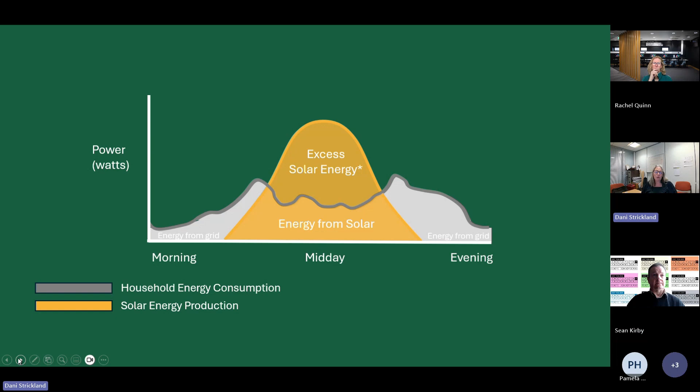So in the UK, obviously there's a big push for net zero, but when you use electricity is not necessarily when you generate it. For example, you might generate lots of power during the middle of the day, but use it in the evening when there's no sun shining. So there's a requirement to deal with that. And what you find is that many people now oversize their renewable energy so that they're generating much more than they could use, to help even this out.

For example, one of the implications of this is that we've oversized our wind farms in Scotland, because Scotland's a nice windy place, but at the same point, because of grid stability issues, we're having to curtail them. So there's a lot of renewable energy assets out there that aren't necessarily being used properly.

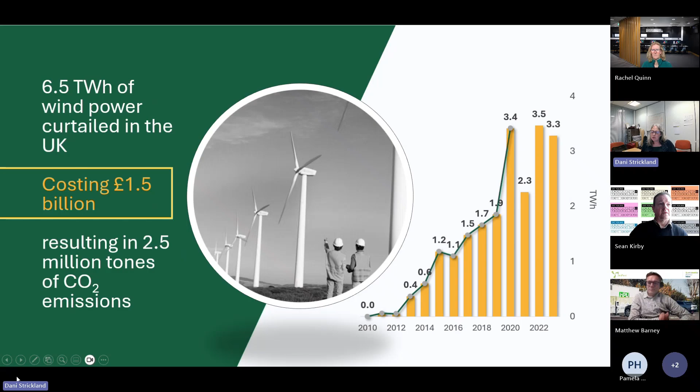On the other side of the world, there's different problems. There's a big shortage of electricity, and in addition, particularly related to things like heating, there are problems with polluting fuels. So you have people who are potentially using fuels like charcoal, and it's exacerbating health conditions. There are some quite frightening figures about how many people actually lack access to electricity in sub-Saharan Africa.

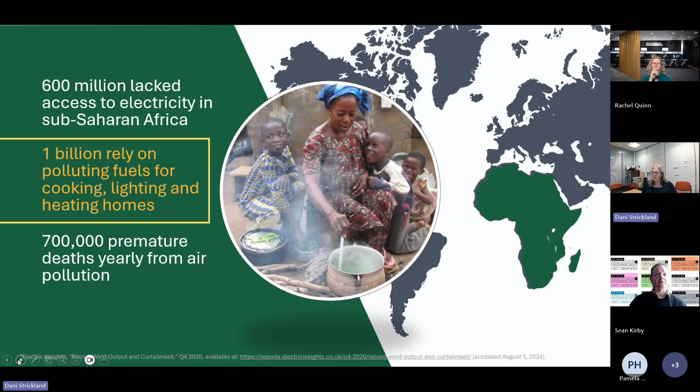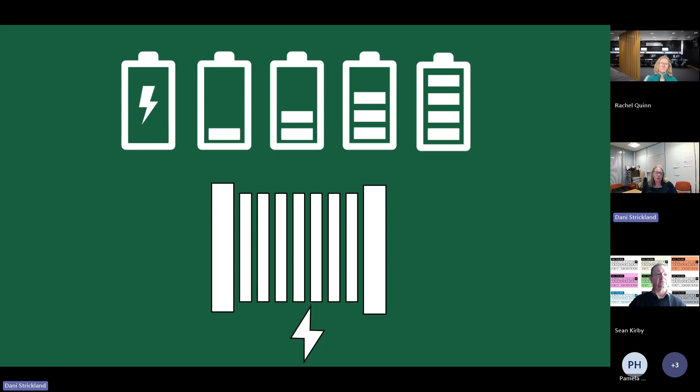There's a lot of research about battery energy storage. For example, this is a good way of using that excess energy and storing it. And there's also a lot of research on electrolyzers, which take potentially excess renewable energy and turn it into hydrogen. The problem is that batteries, once they're full, you can't charge them anymore. And electrolyzers don't always operate very nicely with renewable generation, and also there are issues with potentially precious metal use.

So leading on, this is really my area of research. What we do is research into a battery electrolyzer. It's a single device that allows you to operate both as a battery and an electrolyzer. So it can charge and discharge as a battery, but when the cell is overcharged, it produces hydrogen.

And we've designed our system so that we separate out that hydrogen from the oxygen, which occurs when you pass electricity through water. We then collect the hydrogen gas and we compress this, and it can be used. And because it's based on lead acid technology, it's very flexible and can be used very easily with renewable generation, as it has done for many years.

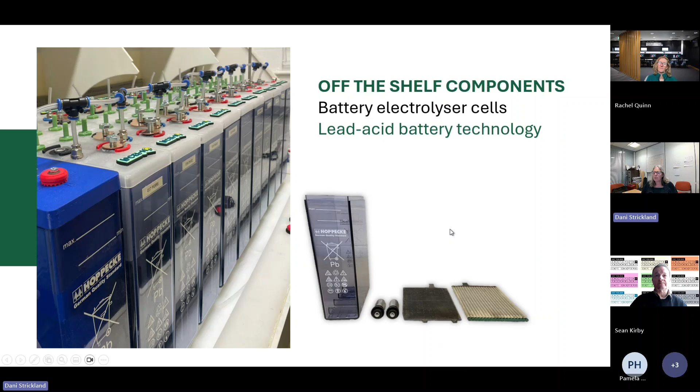We mostly use off-the-shelf components. So we work with battery manufacturers, Monbat and Hoppecke. And we use, for example, Hoppecke boxes, terminals, and their lead and lead oxide plates. And we create our own cell design using their off-the-shelf components with some additional components, which is a separator and a 3D lid structure.

Our cells work really well. We have greater than 99% purity. Our electrolyzer efficiency, when we have some catalysts in there, is 71%. Charge efficiency is 80%, so very similar to what you get for a battery. And when we have 160 cells, which is our current design, we get 20 litres per minute.

And this seems to be flicking on without me, so I'm not sure what I've clicked. Yeah, that's better.

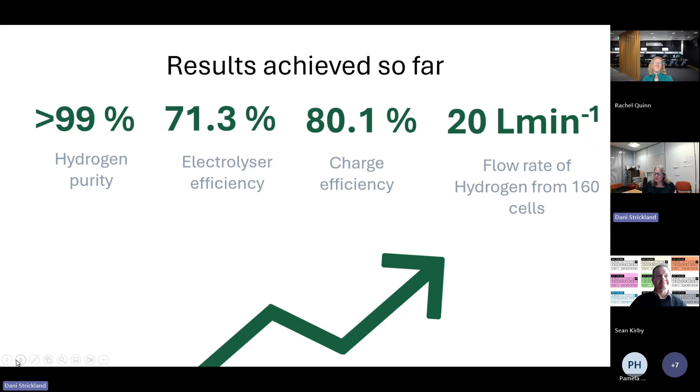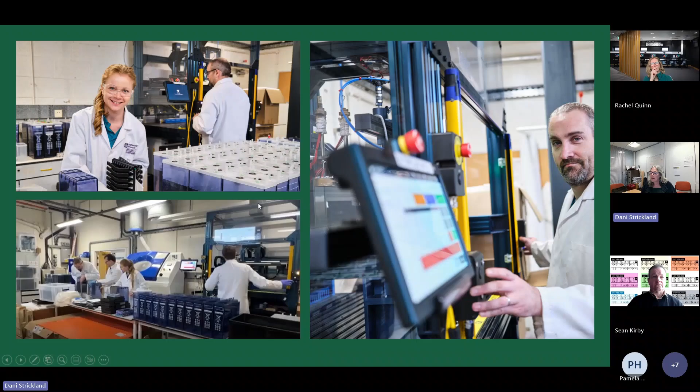We have a small manufacturing plant that was made viable thanks to East Midlands Freeport as part of the East Midlands Zero Carbon Innovation funding. And this is allowing us to make cells at small scale, but also so that they can be manufactured consistently, so we get good consistency of results. And this is just showing our line with a cell manufacturing and then a cell assembly area.

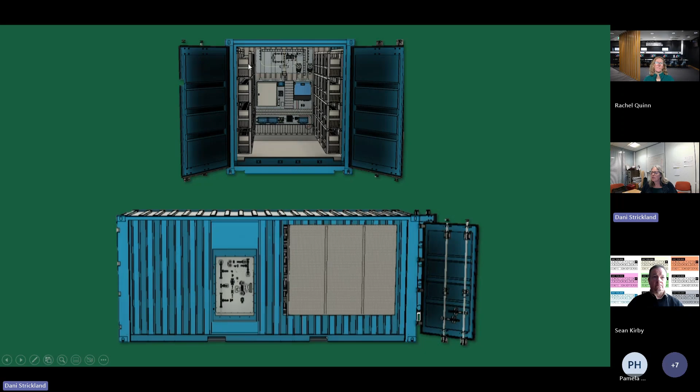And then to the side, we have a purge panel that enables us to purge with nitrogen. So we have the cells, collecting them through the electrical system. The gas goes through into this side of the container where it's compressed and stored.

This is our first pilot in the real world. We're very excited about this. This was commissioned in November last year. It's a container in Malawi as part of the MESCH project. And what it does is it provides hydrogen for cooking. And here we can see the local population trying their Falcon hydrogen cooker for the first time.

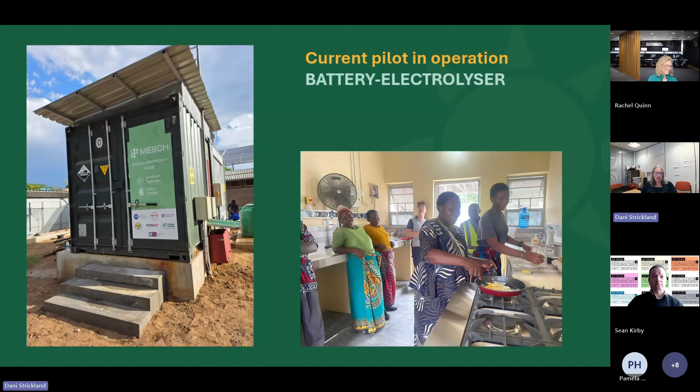So I would say that our research very much is about taking low cost materials that are not precious metals or are very abundant, and turning them into things that are potentially useful. So it's not the same performance that you get from an off-the-shelf electrolyzer, but it's something that's a lot cheaper, a lot more recyclable, a lot more easy to scale.

I think that one of the lessons to the learners out there is it's very difficult to do research on hydrogen without partners. And the more partners you can get, the better, because really you're getting that whole wealth of experience from a whole range of people. And that is very invaluable. And as a team, it makes working towards a goal more pleasurable, and also just much quicker.

So outside of my research, we have the Centre for Doctoral Training, which is about research more at PhD level. We work with a lot of partners. The theme of the CDT is accelerating the affordability, scalability and sustainability of green hydrogen and wind energy.

These are just some of the examples of some of the projects. And again, they've got this ethos of low cost, abundant material, trying to make things better, trying to move towards net zero. So we have things like producing green hydrogen from seawater. We have sustainable fuels and solid oxide electrolysis cells, transporting hydrogen, all the way to sort of component level,

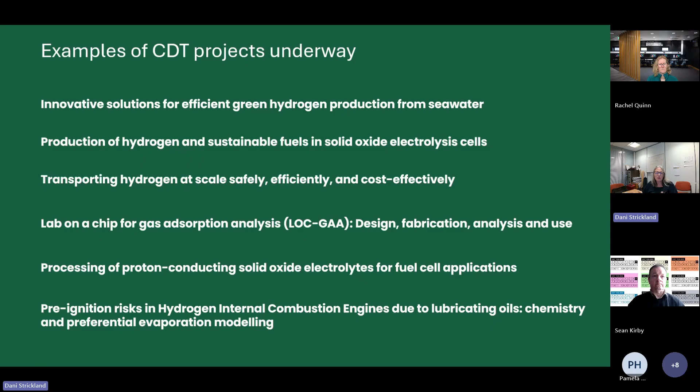So what I would say to any students out there is there's a real raft of R&D in hydrogen in the region. If you want to get involved and you have a 2:1 degree or a master's, and this is the kind of thing you'd like to do, please do get in touch.

And then really what we sort of follow through with the CDT is that the CDT is slightly different from a PhD because you have this sort of skills and taught content. So you have a year to 2 years of learning different things that we think are important that you will need. This is the kind of thing that we help our students to pick up through those first few years.

So we believe that health and safety and standards are very important. Obviously, hydrogen's explosive. So we would encourage you to understand about DSEAR, understand about things like the HAZOP process, and really engage with IGEM, the Institution of Gas Engineers, which is a national institute but they have a Midlands base. They have a number of standards which people use within their design, and they're very open to students having access to that and having the help.

Practical design and build skills we feel are very important. So we do things like wiring, basic plumbing, Swagelok, workshop skills, soldering. So we try and encourage all of our PhD students to have that practical skills base. And then more soft skills, so test planning and commissioning skills. How do you write a test schedule? How do you plan to commission something? How do you sort your documentation so it looks like what you'd need in the future?

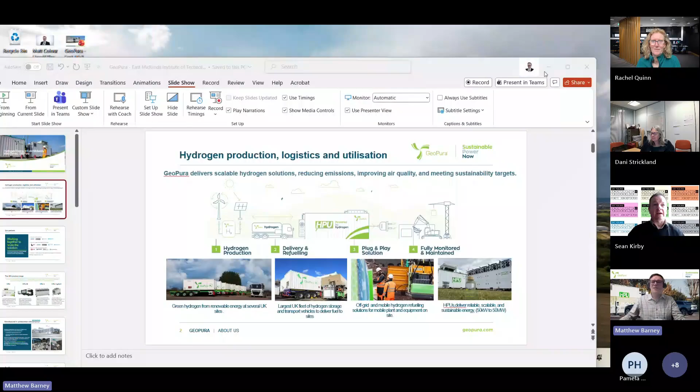I'm going to try and share my screen. And just for your information, Matt, we record all of these sessions because a lot of people can't make them in person, but they do view them afterwards. Well, really happy to be here. More than happy for you to record and share as appropriate. And for those that would like to visit the site, please get in touch. But can you see my screen? Not at the moment, no. Oh dear. I have a backup copy. Let me try one more time. Now I think you can see something. We'll try again. We will get there. Fantastic. Yeah. We're there. Happy days.

So yeah, Matt Barney, I actually live in the East Midlands, right under the flight path of East Midlands Airport. I moved here in the 1980s. My dad was responsible for coal deliveries to all of the Nottinghamshire power stations, working for British Rail. So quite incredible now to be producing hydrogen at one of those former coal-fired power stations, High Marnham, here in Nottinghamshire. I'm actually sat at High Marnham today. But a little bit about the story of GeoPura.

So Dani, your last comments there about commercialization and where we need to get to. GeoPura really has been a vision, birthed out of Nottingham University, to commercialise hydrogen, both use of hydrogen, so in our case hydrogen power units, generators effectively, using hydrogen to create electricity at any place, anytime, at any scale, but also the production of hydrogen, making that green, renewable hydrogen to feed the generators.

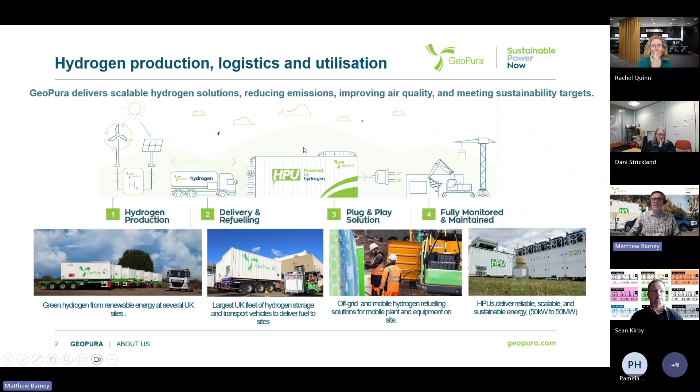So that's led us also into, at point 1 there, hydrogen production using renewable electricity to create hydrogen at scale using water electrolysis. And then obviously we've also had to invest in the A to B of how you get hydrogen from where you produce it to the hydrogen power units. So we've also got a fleet of trailers, tube trailers, that help us deliver the hydrogen, get it across the country, indeed across Europe as well.

Really great to have been joined along this journey with some fantastic players, Siemens Energy, who've been a collaboration partner from day one, but also some other folks who've supported GeoPura's journey, including Barclays Bank, Swen, General Motors, and also the UK National Wealth Fund.

And it's been fantastic that the commercial model that underpins what GeoPura is doing enables us to make real baby steps, stepping stone steps of growth, both on getting hydrogen out there in terms of electricity generation, but then also that hydrogen production to support. We've been able to raise getting on for £200 million over the last 6 years to help us support this journey, with some really solid players behind us who also believe in what we're trying to achieve here.

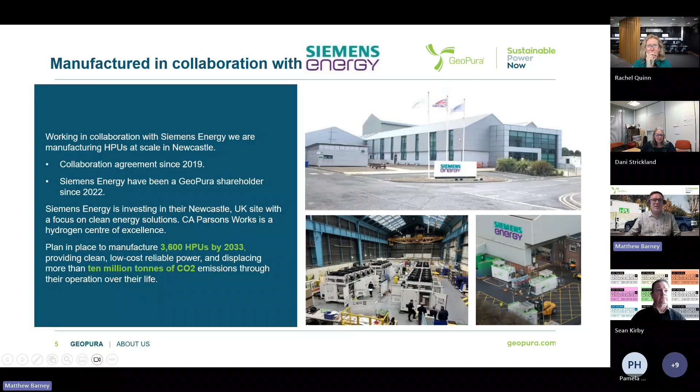But you can see we're slowly encroaching across that facility and manufacturing HPUs at scale, and really thrilled also to have, along with Siemens, a hydrogen apprenticeship program in play. We've got 24 hydrogen apprentices, now 3 years in the run, so 24 hydrogen apprentices coming online each year, and we also have a graduate program as well working there up in Newcastle, so really fantastic.

These are a few of the customers, great names that we've been privileged to work with. In every case, people like hydrogen and they like not breathing in the toxic gases you get out of a diesel generator exhaust pipe. Funny that. But they also like the reliability aspect, as I mentioned, and the fact that these systems are super reliable. So if you're doing live TV, for example, we do a lot of work with the BBC, Winterwatch, Springwatch, Autumnwatch. Traditionally, you'd have lots of diesel generators running just in case your primary generator went down, as often happens with the diesel gen.

Not needed with a hydrogen power unit, because the reliability factor is so much greater with it being hydrogen fuel cell and no moving parts. So to give you an idea of some of the customers that we're working with, some great events and festivals across the UK, some really great well-known artists like Chappell Roan at Lido, and last year this was at BST,

you can see there on the right hand side, quite a moment for the whole hydrogen industry really, supporting Neil Young, the Royal Philharmonic Orchestra, Cat Stevens across 4 days, 65,000 people in attendance there at Hyde Park at the Summertime Festival. All that power on site coming from hydrogen produced here in the East Midlands, green hydrogen. If you attended, you would have had no idea other than the fact the air was that bit cleaner. And if you're on the production team, you've been delighted because, again, that reliability that you get from the HPU is a real addition to live performances and shows.

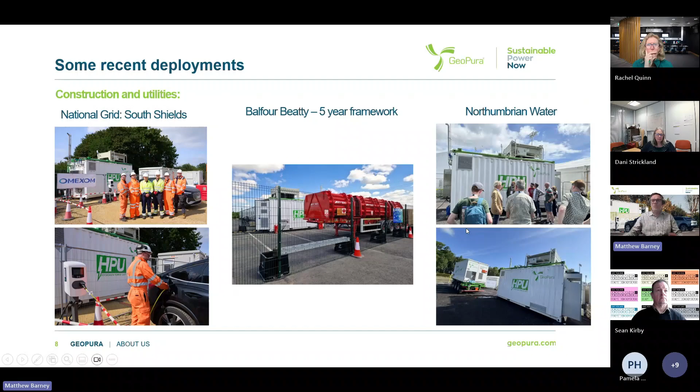And then also working on construction sites, Balfour Beatty, we've got a 5-year framework for the supply of hydrogen power units. So if you work for Balfour, you can call off an HPU just as you would a diesel generator. It can be on a construction site supporting whatever activities you might be doing. With utilities, National Grid, Northumbrian Water, there's all sorts of opportunities to displace diesel generators across a variety of sites. And I think I already mentioned film and TV.

That's been quite a mainstay of work here at GeoPura, working on some productions really well known, like Bridgerton and The Diplomat. Just last year as well, Downton Abbey. We actually powered, I think, 900 hairdryers on one of their production sites where they've got 1,500 extras. It's quite phenomenal how much power is used in making some of our great film and TV shows. There's a short video here, which we will try and play.

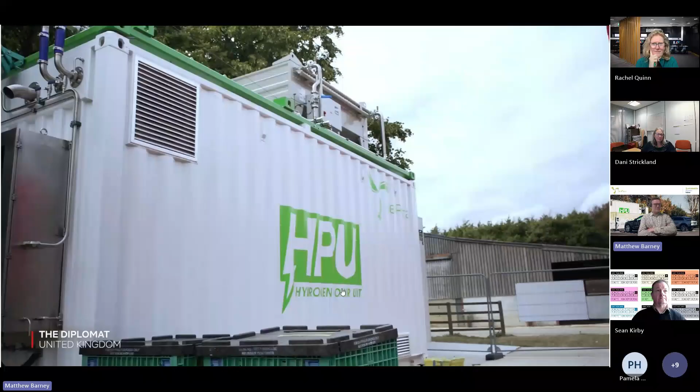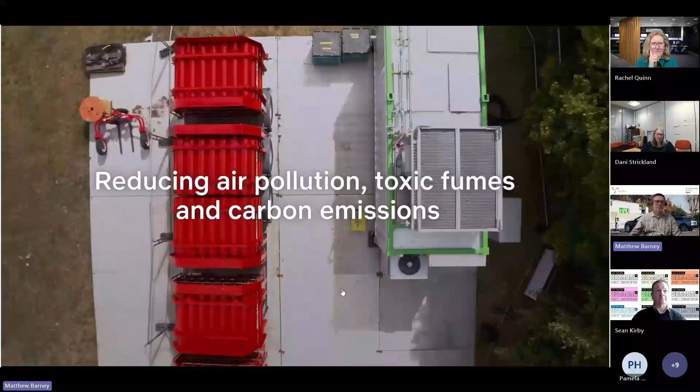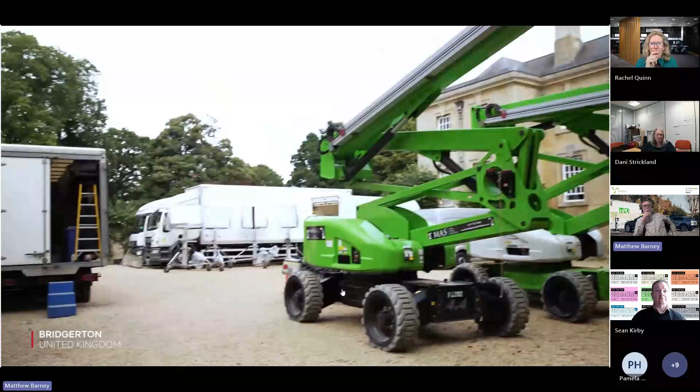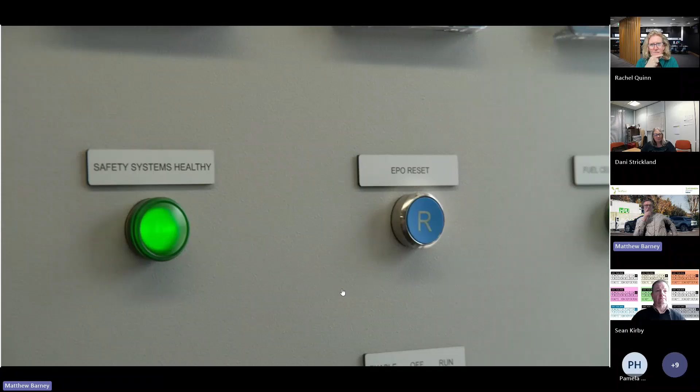There's power in the stories we all tell. But what about the power that goes into bringing these stories to life? While diesel generators have long powered productions across the entertainment sector, Netflix is testing a new, cleaner approach: hydrogen power. Alongside other technologies like batteries, hydrogen power units generate safe and reliable electric power, benefiting production crews and surrounding local communities by reducing air pollution, toxic fumes, and carbon emissions. That's hella cool. So how do they work? These machines convert hydrogen into electricity, and unlike diesel generators, the only byproduct is water. It's actually water that you can drink. And we're already testing this technology on hit Netflix shows. From The Diplomat, Season 1, powering the entire base production with green hydrogen for weeks. What works well is it's seamless. It feels like it was a normal base run by diesel generators, but in fact we're using clean energy. And Bridgerton, which used green hydrogen to power cast trailers and work trucks at the studio for the entire 3rd season of production. We've had positive experiences with the hydrogen cell. It's really well received by the crew. It's powered the unit base really successfully. Lupin, Part 3, which was the first French production to test mobile hydrogen power. After successfully integrating hydrogen power into recent productions, we're working to expand our use of this clean tech across future productions. It's our first time using hydrogen, and we would definitely use it again. The whole experience has been super positive. Because here at Netflix, our mission is to entertain the world. And that requires a habitable world to entertain.

Oh, forgive me, I'm trying to move on the slides. It was working so well. We've got a little crash. We'll just restart, forgive me. I've got a couple more slides I would just like to share if we can get them to restart. Try pressing N on your keypad. It doesn't like it. No. It's only a minor glitch. We'll hold on 1 second. Let me see if I can do it.

I'd like to show you the next slide just because I've got a little bit on High Marnham, which of course you are welcome to come visit, as I say, but for those of you that won't make it, I'd just like to show you.

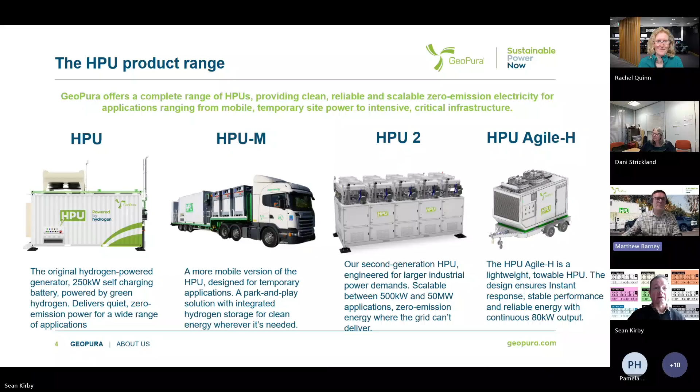Click, no, go past that. I think that is the slide. Hooray, you're right, that is the Knight in shining armor, Sean, thank you. That's great, right, shall we press on?

This is actually the third site we've built. We've built a site in South Yorkshire and another one in Nottinghamshire as well.

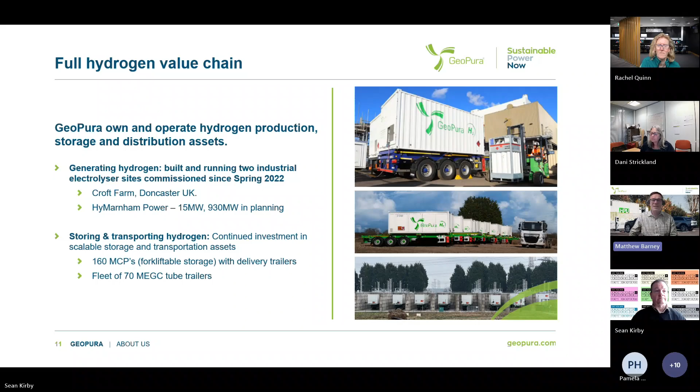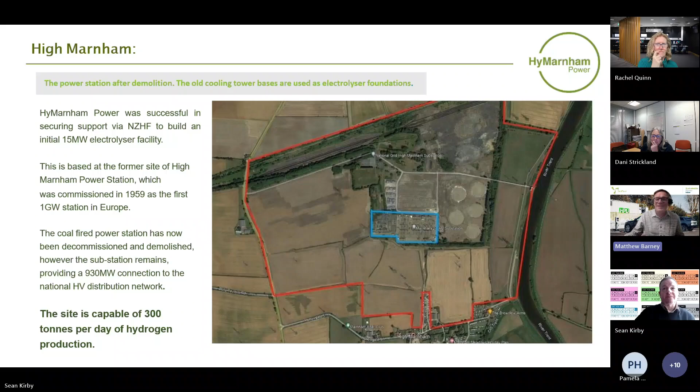I don't know what - have you moved the slide on, Sean? I'm still on the last one. We're on, we've just seen the one with GB. And so you're on, in the heart of the East Midlands. I'm sorry, there's something really wrong on here - the High Marnham site. The aerial photo, so you're probably somehow one ahead. Just tell me what to say at the top. You're on High Marnham, are you? Yeah, High Marnham Power, and it's the area, as Rachel said, it's the aerial view. Right, so sorry, I was talking to that side. There's something very wrong here, I'm seeing the slide ahead of you guys. So if you go to the next slide. Next slide, yeah, so that should be now slide - in the heart of the East Midlands, slide 14.

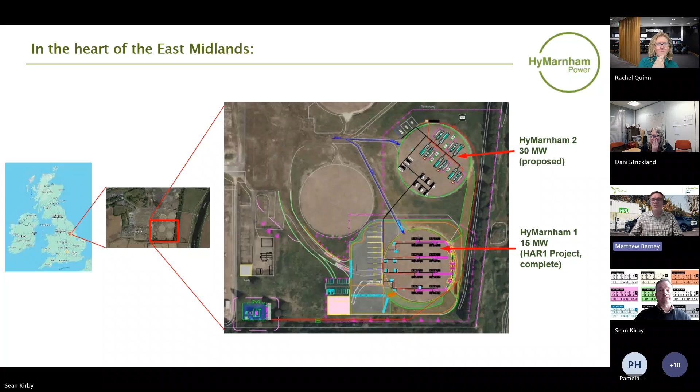You're wonderful, okay. So in the heart of the East Midlands, you can see the 15 megawatt we've already built on the bottom cooling tower base, and we're planning on putting in a further 30 megawatts in the coming months - hopefully in the next 18 months we'll be scaling that. You can see again the economies of scale kicking in - we're doing this on a more industrial basis, using the same area footprint but potentially having twice the capacity using larger electrolyzers. So all very encouraging stuff.

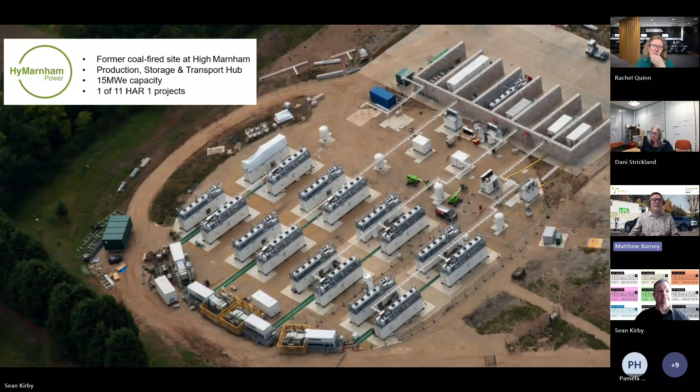I mentioned Network Rail and the possibilities on slide 17. We were thrilled, just before Christmas, to do the first movement of hydrogen by rail - I think the UK's first - again showing the interest from other players to support this.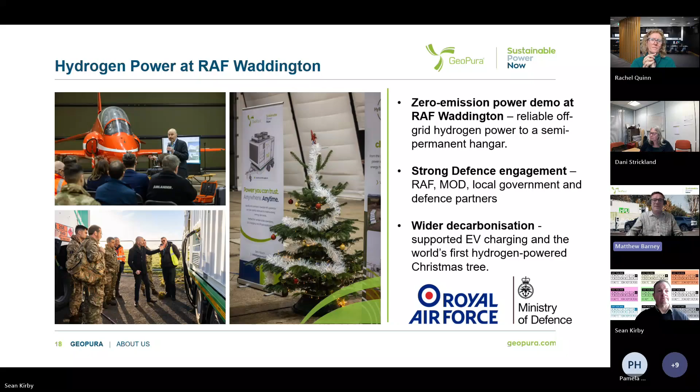This is our most recent project, really thrilled again. It happens to be adjacent to the Lower Thames Crossing site, but now we have an electrolyser down on the Thames at the Port of Tilbury - the UK's third largest port, part of the Forth Ports group, responsible for import and export of almost everything that comes in and out of the UK. There are huge aspirations to decarbonise ports and shipping, supporting charging of vehicles and electricity supply to boats and vessels in port and at dock, but also all the forklifts, reach handlers, and diesel equipment that moves shipping containers around sites. There are so many applications where hydrogen would be so much better, providing resilience and security to produce your own fuel locally to support the commercial activities we all rely on in our everyday lives.

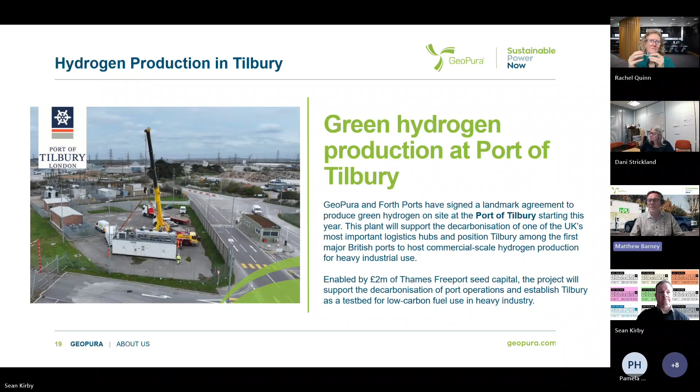Matt, that's really, really helpful. Just a couple of reflections from me - the scaling from 15 to 930 megawatts is ambitious, isn't it? It's huge. What sort of timelines are you looking at?

I've been really privileged to be involved with GeoPura since before we began in 2019. I've known the folks who started it, our chief exec Andy, for many years - he actually lives in Wysall down in South Nottinghamshire. Initially we were looking at spreadsheets back in the early days of what we thought we might achieve, and it didn't seem believable or credible.

We were talking about, could we get a 250 kilowatt electrolyzer up and running, and we did that, and it was a big moment, it felt massive. Then High Marnham of course feels huge, 15 megawatts. It's tiny. We're not even, you think how much fuel is used in the country every hour, every second of every day, we're not even scratching. This is still tiny scale.

What's exciting is that the commerciality, the model that sits behind GeoPura, is enabling that organic growth. And it feels like the foundations are now in play to rapidly expand from where we're at. The infrastructure that we now have, the expertise that we now have, not just us, there's lots of others as well who are doing some great stuff in this space. It feels like that moment, that tipping point could be here where we could scale very quickly.